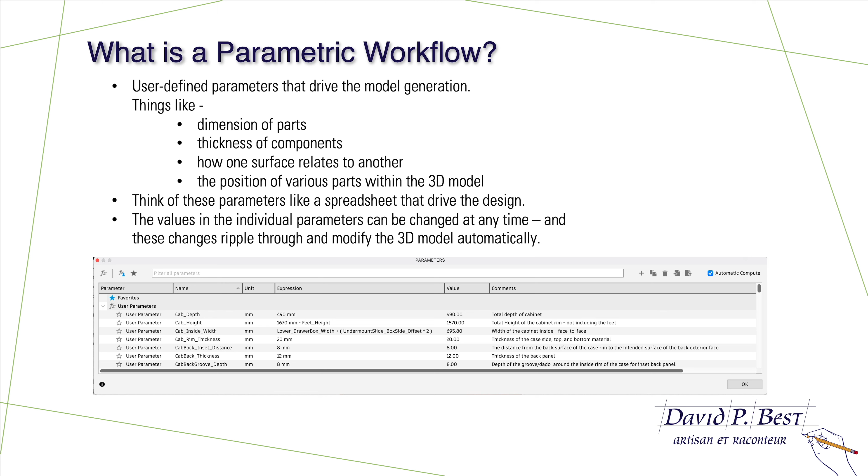So if you were to design a cabinet, for instance, that was 20 inches deep and you or your client decides, no, I'd really rather have it 18 inches, then you can change the parameter on the depth of the cabinet, and if you've done the design correctly, everything will update automatically, including the depth of the drawers, the sides of the cabinet, the size of the top, all of those attributes. So that's what we're after here.

I want to spend just a second here on some commentary about my desktop tools in the physical workspace that I work in. To use Fusion 360 effectively, you really need a 3-button mouse with a wheel. I happen to use one by 3Dconnexion, but pick your favorite brand. I do like a full-size keyboard because we're entering numbers quite frequently here in sketches and things of that nature.

The other aspect that I use is something called a space mouse. It's also made by the same company, 3Dconnexion in the UK. It's a puck that sits on the opposite side of the keyboard and is controlled with your other hand, and it allows you to manipulate the model as you're viewing it by zooming in, zooming out, rotating the model, turning it around, all kinds of things.

You can do those functions using a regular mouse and a bunch of option keys on your keyboard, but I much prefer this. I find it more intuitive. It's not cheap, it's over $100, but since I spend almost 40 hours a week doing this kind of work, I much prefer this to the traditional manual method of manipulating the view of the model within Fusion.

The other thing I'd like to point out is that throughout this whole series, you'll see a consistent use of toolbars that I have arranged the way I like to work. You can arrange the toolbar yourself however you want, but this is the toolbar I use for design, the toolbar I use for sketching. And you can add or remove tools or rearrange them however you want within Fusion.

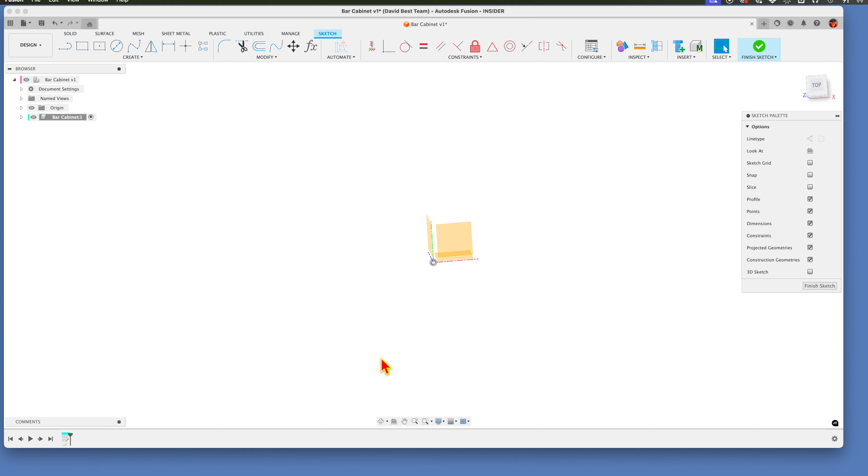So I'd like to first create a transparent model of the outside dimensions that the client gave as maximums. Let's create a sketch, and let's put it on the bottom plane here. Might as well talk about the origin here for a minute. Let me turn it on. I like to work in a coordinate system where the blue or z-axis is up, the red or x-axis is side to side in the design, and the green axis, also called the y-axis, is front to back. That's just my preference.

So we're going to create a sketch on the bottom plane there that represents the width and depth of the cabinet as specified as maximums by the client. So we're going to do a center point rectangle. If you don't have it on your toolbar, it's right here, and you can add it with those 3 buttons just like I talked about before. We're going to pick up that point in the middle, come out, and that's going to represent the maximum size of width and depth of the cabinet. We'll get to the height here in a minute.

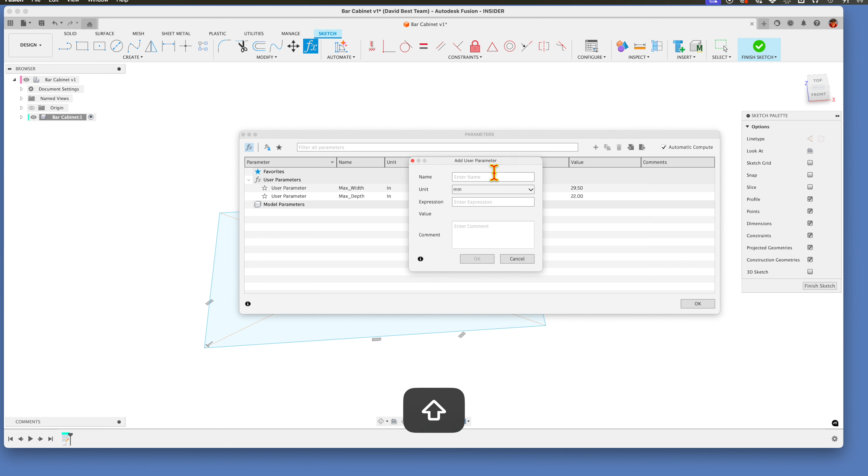I want to drive this with parameters rather than putting specific dimensions into this sketch. So let's create our first set of parameters here. This little plus sign here will allow us to create things, and we can specify units and all that. So max_width, that was given to me in inches, so we'll select that, and it was 29.5 inches. So we'll add that. There it is. Let's do another one. Max depth, and that was 22. And then max height, also given to me in inches, was 76. So there we are. Now we can use those parameters to drive this sketch.

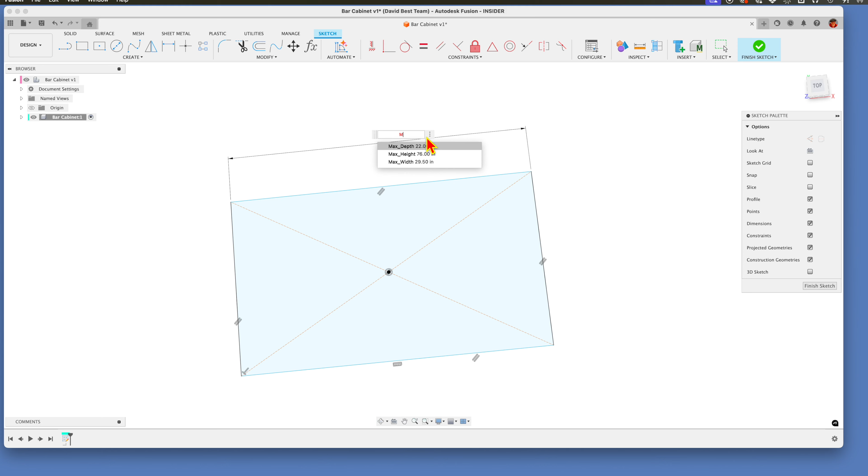So we'll say OK here, and it's time to put those dimensions on this. So D for dimension on the keyboard. Now we can just start keying in, and we get a drop-down list of things that have the letter M in it. So max width here of 29.5, and D again for this side, and this is M for max depth. So that's the profile of the bottom of the cabinet, maximum as defined by the client. We're going to use that now to create a component that represents those outside limits.

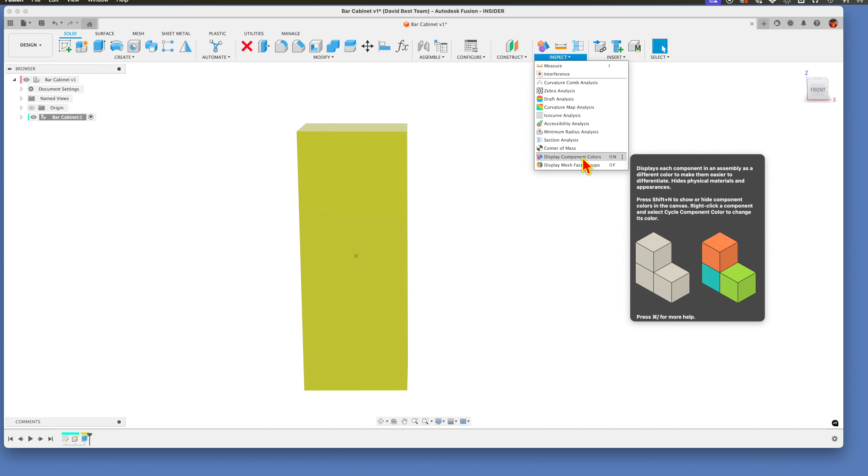So on the keyboard, E for extrude. We're going to extrude this up. How far are we going to extrude it? Well, we're going to extrude it max height, right there, 76 inches, and we're going to create a new component, not a body. So there it is. Now I've got it colored because I've got the inspect tool set to display component colors. If you don't have that turned on, you're going to get a series of gray boxes like this. So I prefer to have display component colors on, because then every component that's created in here will have a different color that's tagged by the lines on the top of the elements in the timeline, and also inside the browser.

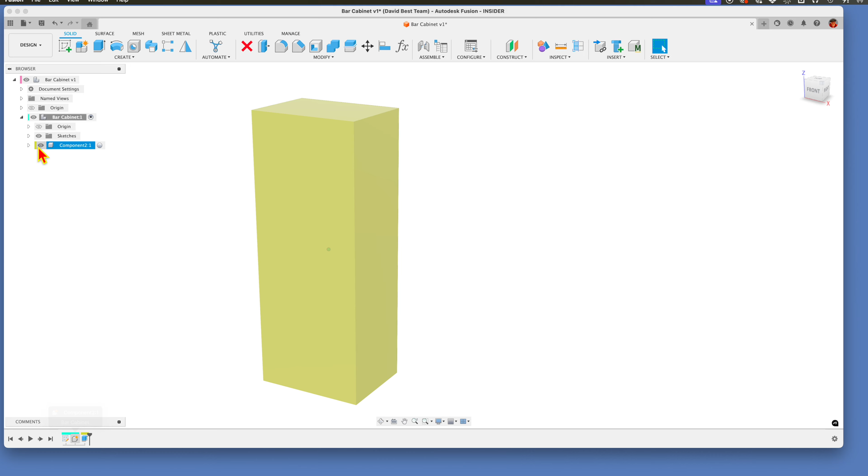So you see this green line there represents the green color of that component. Helps. It's not necessary, but I like to use it that way. So that's our maximum. Let's do a couple things here.

Let's first, I am a big believer in labeling your pieces in the browser here as you go along. And the reason is because you come back to this the next day and you wonder, where's the sketch for the bottom of the cabinet? And if you've got nomenclature that's sketch 1, 2, 3, 4, that's not going to be very helpful. So let's just change the name on that. 2 slow clicks on it and you can enter a new name. Max bottom profile.

And while we're at it, let's give this component that we just created a name as well. 2 slow clicks. Max outside dimensions. So there we are, and we can turn this on and off. We've got the 3 things that created it here in the timeline: the sketch, the create component, and then the body within it, created with an extrude. We could go back and edit those if we wanted to.

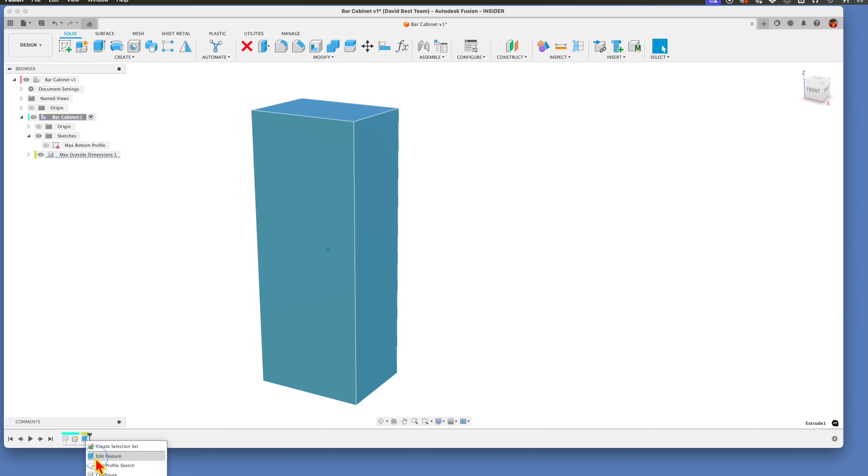For instance, let's edit that feature. Now we can go back and change these things again. That's the beauty here. All right, so that's our maximums. We'll use that in a different way here in a minute. Let's start working on the cabinet itself. And I like to start on something like this at the bottom and work up.

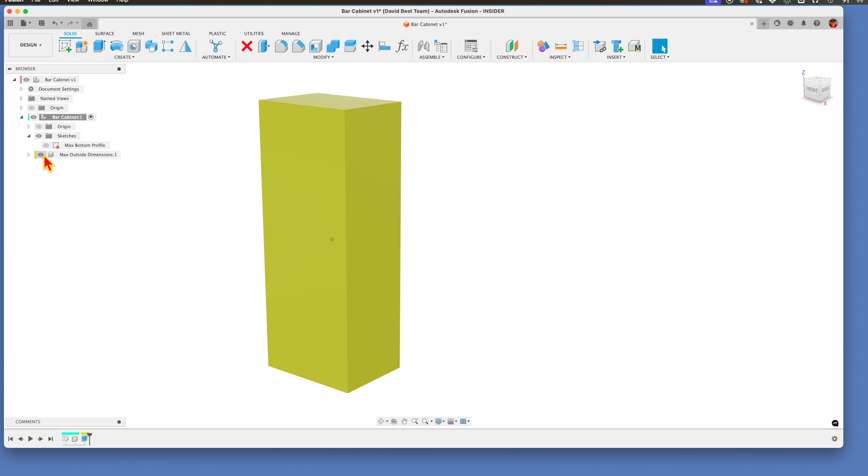So I'm going to turn that off, and I'm going to do a right click here, and I'm going to create a new component again. And this is going to be the cabinet case. And that will include the top, bottom, 2 sides, back, and legs. So let's just do that. So let's create a sketch of the cabinet profile starting at the bottom. We'll do a create sketch here, and we'll do this on the bottom plane, which is right there.

I'm going to use a center point rectangle again, and we'll pick up the center there, and we'll come out. I'm going to draw the bottom panel first. We'll come back in a minute and put in some dimensions. So if we pretend that's the bottom panel, we want 2 side panels. Whoops, I don't want to use a center point rectangle there. I want to use a regular rectangle.

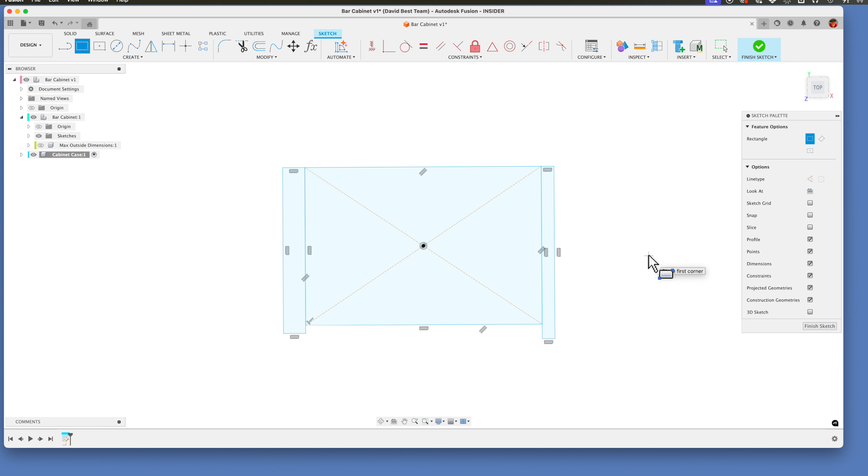I want to pick up that corner, come down here. We'll say that's the side. We'll put some constraints on that in a minute. This is the other side over here. Pick that up. There we are. Now, good rule of thumb here is to try and use constraints as much as possible rather than dimensions.

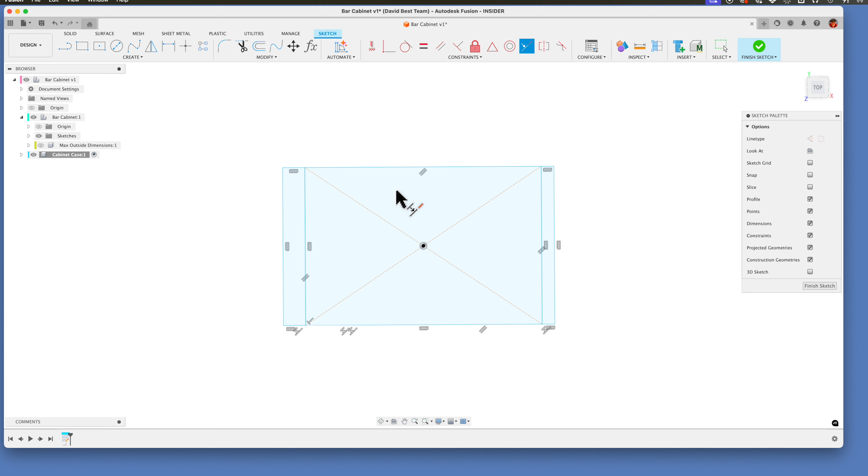So one of the things we can do is say, let's use the collinear tool and say the front of the side is collinear with the bottom. We can do the same thing on this side, front of the bottom. So we got 2 sides and a bottom panel. We need to put some dimensions on this. Let's talk about that for a second. A couple things come to mind.

I would like to keep these side panels, the overall depth of the cabinet, to under 510 millimeters, because that's the maximum capacity of my joiner planer. Remember, this is going to be done in hardwood, and I'd like to be able to glue up a bunch of hardwood panels and pass the whole thing through the joiner planer and then trim it to size.

So let's create a couple of parameters here. Let's say that the cabinet inside depth is 490 millimeters. You can see I've already done that. And I've temporarily created another one here called cabinet inside width of 27 inches. We'll get back to that here in a second.

So the thing that's going to drive the width of this more than anything is the bottom drawer. I outsource all my drawer boxes from a third party. They build it to any specification I give them, but they like to talk to me in imperial rather than metric. So to keep things simple with them, I try and, where possible, make my drawer widths and depths whole

inches. So let's just say, for example, that the drawer width here would be 27 inches. That'll certainly fit inside the maximum limits given by the client. So I've defined that here with a cab inside width of 27 inches.

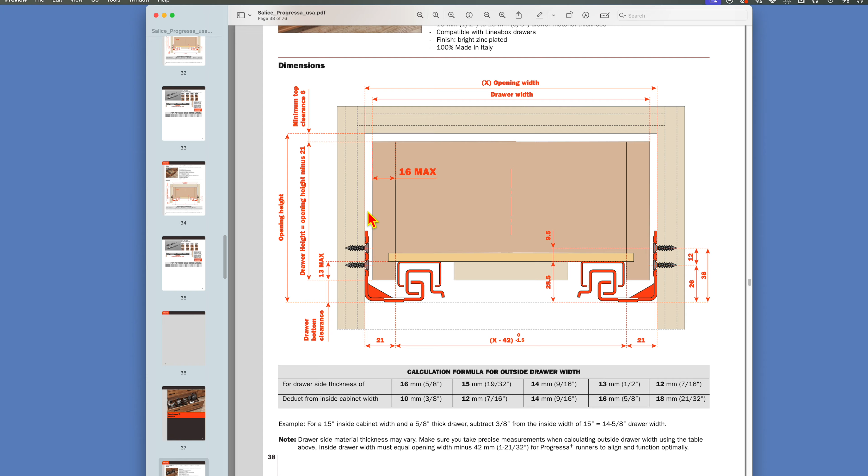Okay, we're back in Fusion. Let's put in some parameters here. I'm going to give them some names. We've got drawer box side thickness. We'll use 16 millimeter material here. My cabinet box supplier is fine with that.

Let's do that offset. Drawer box side runner offset, and that was 21 millimeters. So we've got those two.

I think we're going to do a drawer box that's 15 inches deep - I'm sorry, depth of the cabinet. So let's put that in. We can come back and change that later. Drawer box depth, and we'll put that in millimeters. So we'll say it's 15 inches times 25.4. That doesn't look right, does it? Let's do this differently. 15 inches - how about that? There we go.

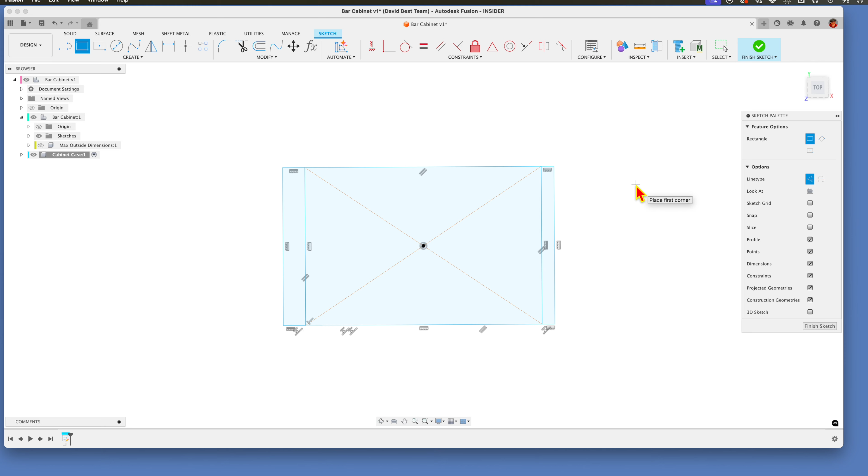So we got those, and now let's go back to our sketch and start putting in some things here. Let's do another rectangle. This time I'm not going to use center point, you'll see why here in a minute. But I do want this to come in as construction geometry rather than hard geometry lines. We can do that a couple ways - you can click on it over here, that'll give us a construction line, or X on the keyboard will toggle that on and off. So let's just draw something here that will be our sort of pretend - whoops, try that again - that'll be the pretend outside of the drawer box, and it's a construction line.

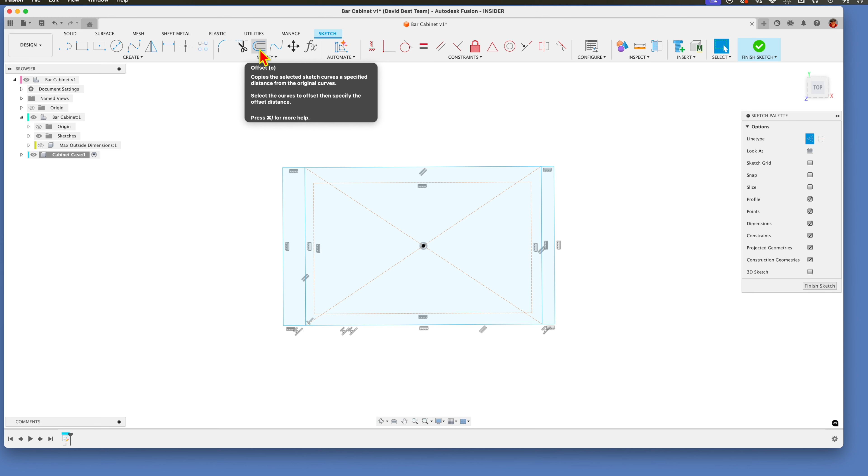So that helps. Now we have an offset tool here in our sketch tools, and we can say let's take that and let's offset it, and the distance here we're going to go to drawer side thickness. There we go, so that's 16 millimeters. You can see we've got an FX on there, which means it's derived from a parameter.

Now what else do we need? Well, we know that this distance from the inside of the drawer face to the side of the cabinet, that's that drawer box offset, 21 millimeters. And we know that's also true on this side, so let's put that in. We don't have to select, we can just click over here and duplicate that dimension on this side. So there we are, and we know the outside of the drawer box is 27 inches.

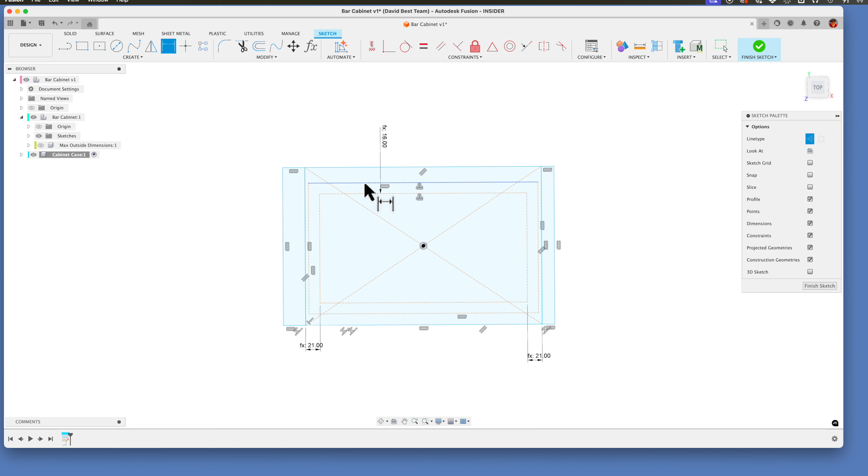So that's this line right here. So we'll dimension that - probably going to get something pretty weird here. Did we have a parameter for that? No, let's do that, let's create a parameter right now. We'll just let that be whatever it is - width.

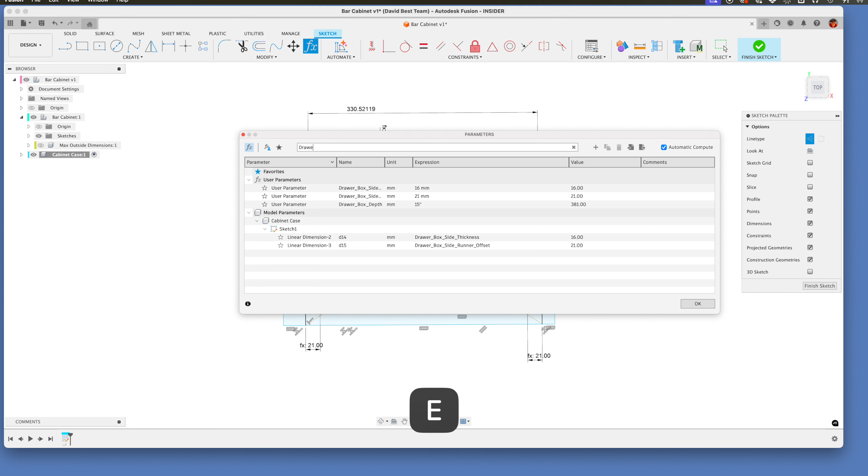Sorry, I didn't create a new one, I do that a lot. So we're going to do this - we're going to create drawer box width, and it's going to be in inches, and it's going to be, we're going to try 27 here. How's that? Okay.

Might be good to, at this point, define the thickness, at least initially, of these side pieces that we're going to mill up from solid cherry. Let's add that as a dimension here, so we'll call that cab side thickness, and let's make that 20 millimeters. How about that? There we go.

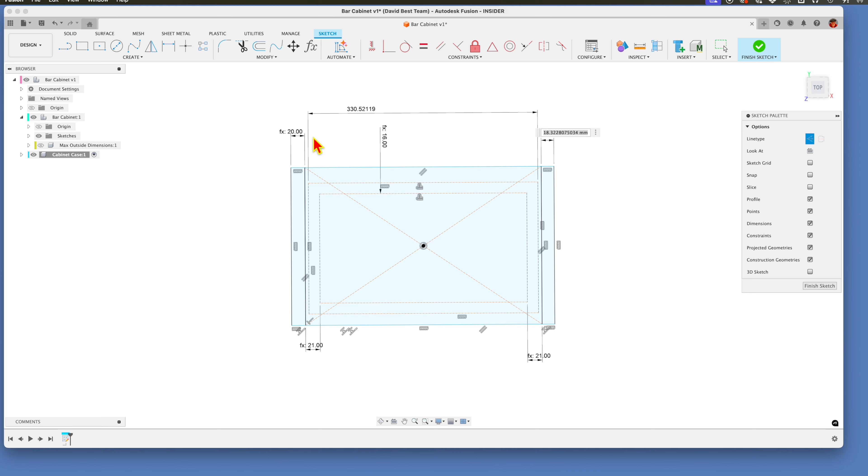So let's put those in here - D for dimension, let's make this the cab side thickness. We'll do the same thing over here, we can copy that one again. And then this one is not 330, it's the new parameter that we put in, which was drawer box width of 27 inches. There we go, the whole thing is going to scale up. And I talked about wanting this side piece to be about 490 millimeters deep. Did we make a parameter for that? Yeah, there we go, cab depth.

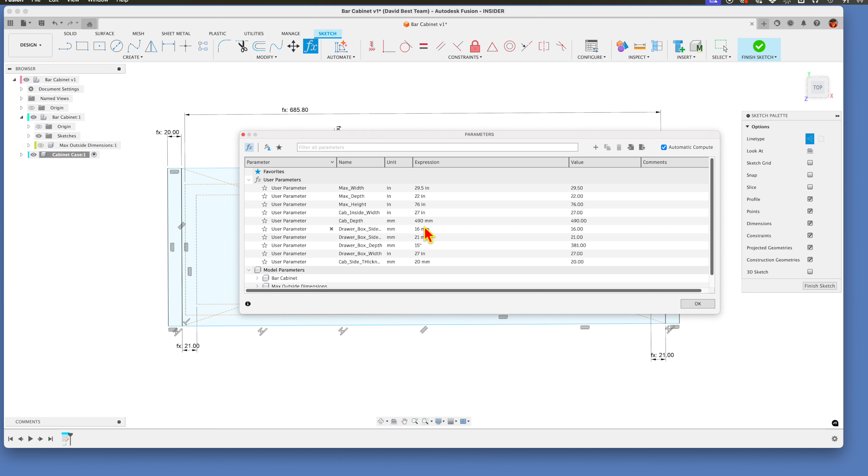So cab depth is 490, that's our overall thing. Two sides, a bottom. This represents the drawer box on the lower part, at least side to side. We could dimension that drawer box depth here. Drawer box depth, there we go. Now it's actually going to sit inside this cabinet somewhere, so we can drag that up just for a visual standpoint.

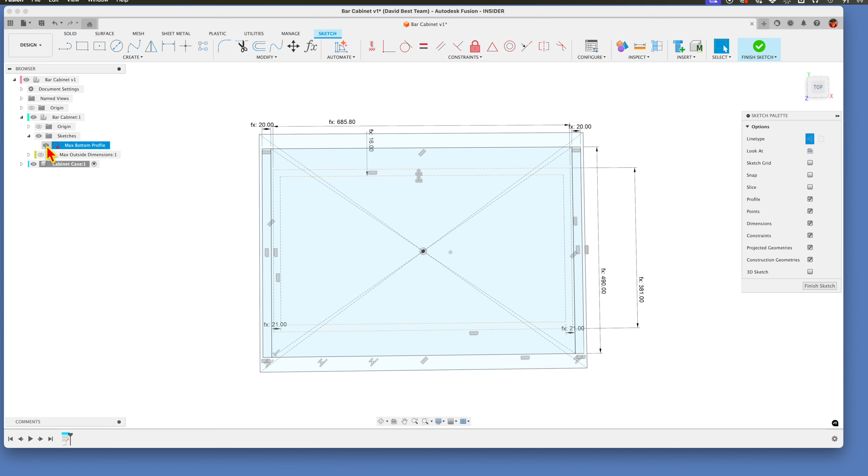So there's our overall dimensions for the cabinet, at least to start out with. We could turn on the sketch for the maximum dimensions, which is right here. And we can see that we're definitely inside those parameters, even with 20 millimeter thick sides and a 27 inch wide drawer box. It's not as deep, but the client says that's fine. So there we are. Let's finish the sketch.

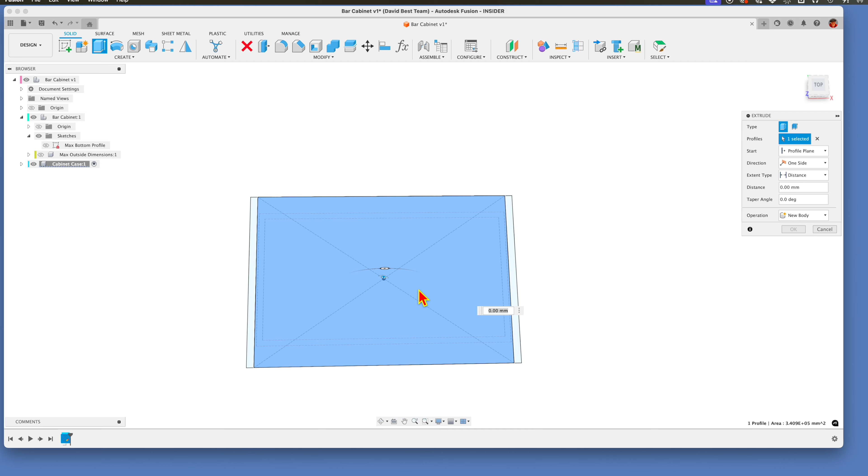At this point, we're going to create the components that represent the bottom and the sides. We do that with an extrusion command, E for extrude. We'll pick this profile, and notice that it picked the whole outside of that rectangle rather than the drawer box inside. That's because the drawer box lines are construction lines, so it doesn't recognize those as valid for something like an extrude command. So anyway, we're going to extrude that at a distance, and let's assume that the top, bottom, and sides are all the same thickness. So we had a parameter for that, cab side thickness.

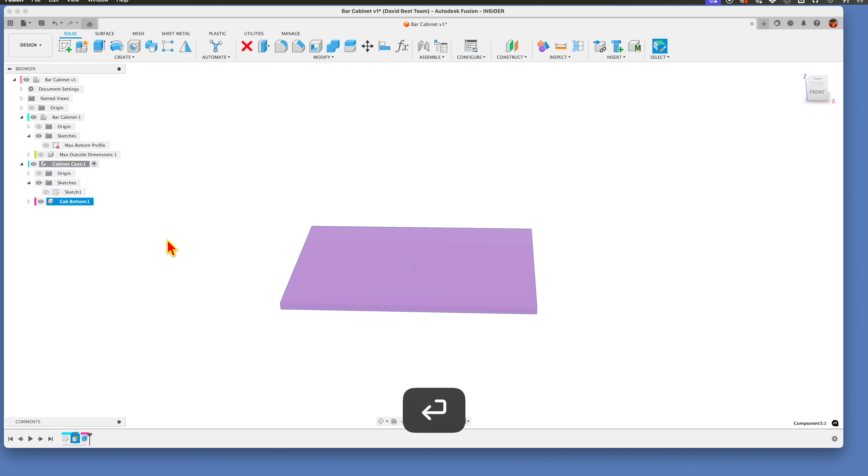There we go, and we want to create a new component. So if we look inside our cabinet case component, we have a new component here. We've got that sketch that we just created, and inside that component is one body right there. So let's name this cab bottom. Let's name our sketch cab bottom profiles.

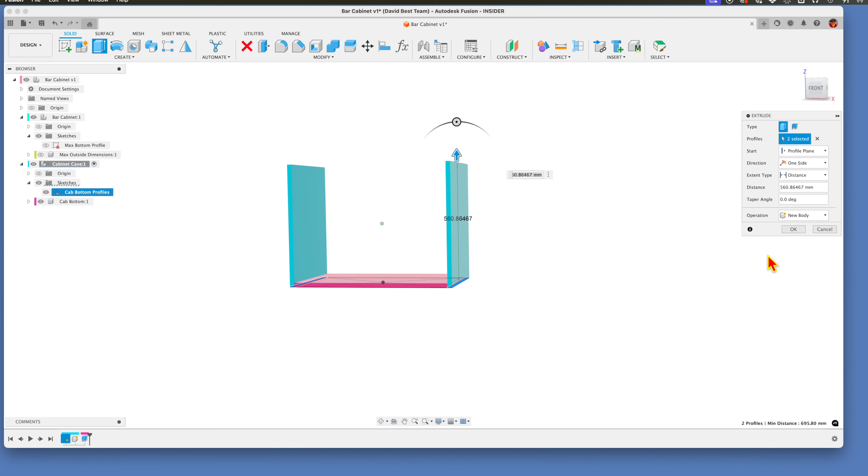So let's create the sides now. We can turn that sketch back on, and E for extrude. We'll pick these two profiles, we're going to go up, and we're also going to create a new component. And the distance here is our... we didn't define a new cab height.

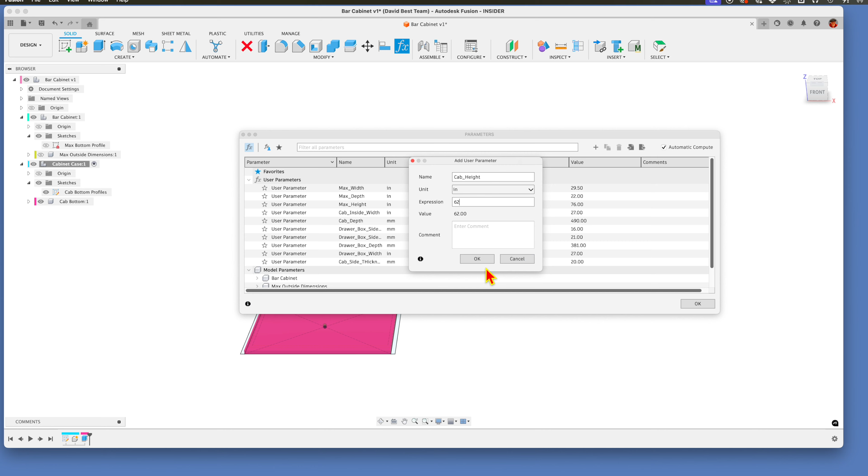Okay, we can do that now. Let's cancel out of this. So let's go back into our parameters, and we don't have one here, so let's make a new cab height. This is going to be without the legs. The legs I see on this will be about 4 inches. So I want this to be in inches, something like 62 inches. Let's try that. We can always come back and change this later and have that update the design. So let's put that in.

Now we can come back and create the sides. E for extrude. Side 1, side 2. We're going to create a new component. The distance is going to be cab height. There we go, and we've got it over here in our browser now, and we can name that cab sides.

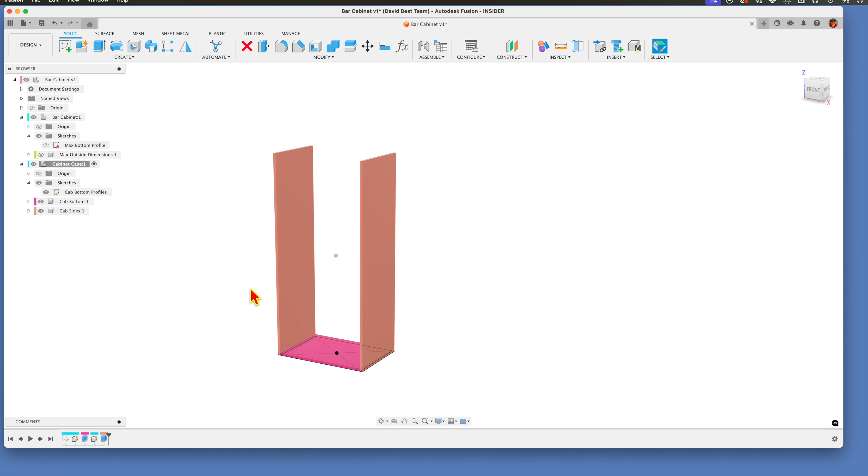And now we want to do a top. So the easiest way to do the top would be to mirror the bottom component. Think of the mirror command in Fusion kind of like it sounds. We'll put a mirror up here, a reflection surface, and just reflect the cab bottom component to the top of the cabinet. So to do that, we're going to need a reference plane that is essentially the reflection surface. Let's turn off this sketch. So we can create a center plane between the top surface of the cabinet and the bottom surface of the cabinet now, to do that mirror command.

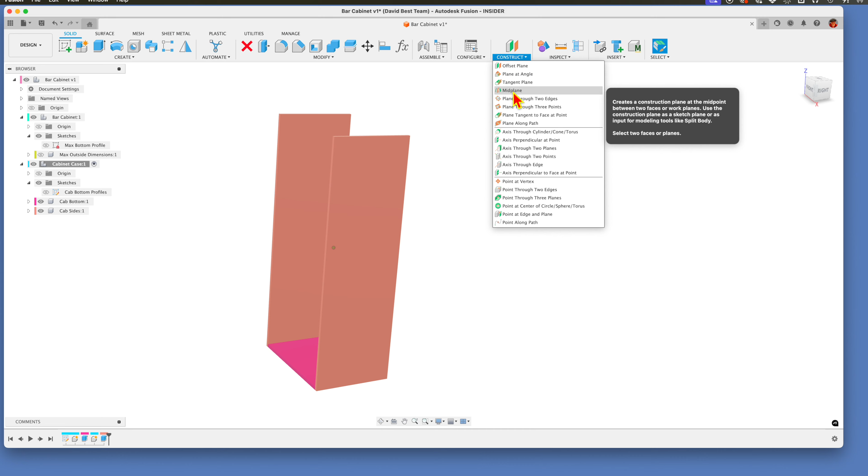So construct, we can do a mid plane, and I want to go halfway between there and there. And there it is. So we can use that as our reflection surface. Now look over here, we have a new item that showed up in our browser called a construction plane, and right there it is. And we can turn it on and off.

We can come in here and do an edit feature, and come back and redefine the two selected sides, and all the standard operations apply. Let's give it a name because we might use it in the future and want to know what this is. So this is mid bottom to top.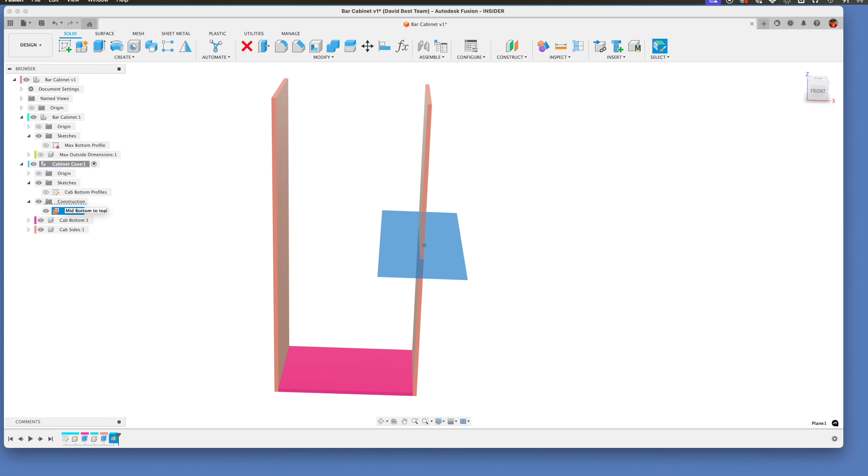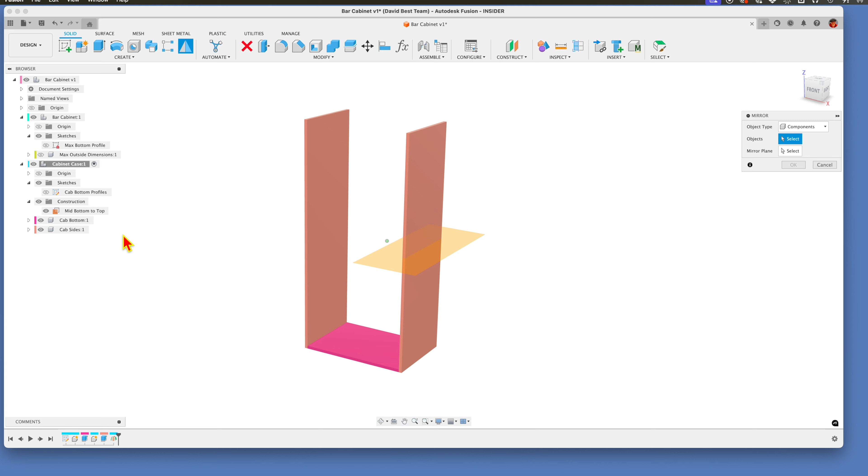There we are. Now we can mirror that bottom component using that as our reference point. I have it in the toolbar up here, right there. I'm sorry, do I have it here? Ah, there it is. So it's under Create, and it's down here if you don't have it in your toolbar. So we're going to mirror, and we're going to mirror a component, and the object it wants us to select is the bottom in this case, and then the mirror plane is that construction plane that we just made. So there's our top component.

If we say OK, we got a new component over here in the browser. It's been labeled cab bottom mirror. Let's relabel it to cab top. How about that?

I'm going to turn off this construction plane here. We're going to add another one here in a minute. So that's our basic box. Let's put a back on this thing.

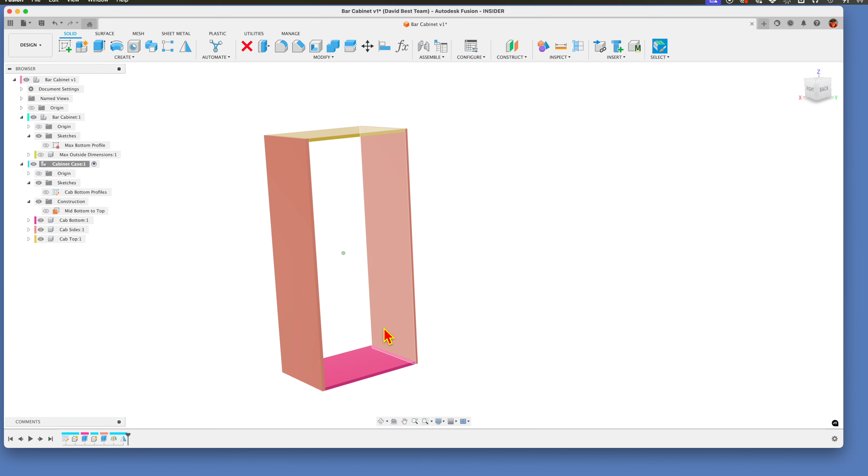I see this back being a 12 millimeter thick cherry veneer faced plywood, and it's going to be let in on all 4 sides with a groove or a dado, and it's going to be slightly inset from the back face of the cabinet rim. So let's create some parameters to drive this.

Let's do this. Cab back thickness, and we'll make that 12 millimeters.

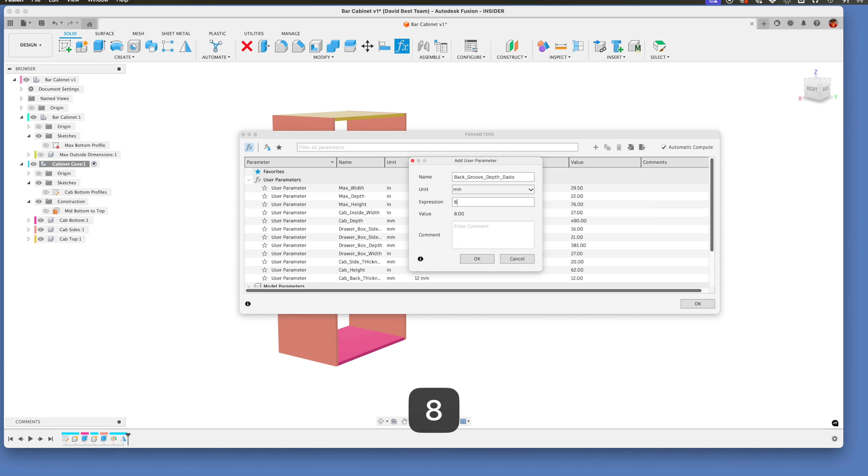Let's do another one that defines the back groove depth. I'll put dado in there just so I know exactly what that is. How about 8 millimeters? That's... let's do 9. That's... no, let's do 8. I like 8 better. That's a little less than 3/8 of an inch.

And then we're going to do a back face offset of, let's do 8 again. So now we've got those parameters in here. By the way, you can sort these by clicking on the heading there, in case I didn't say that before.

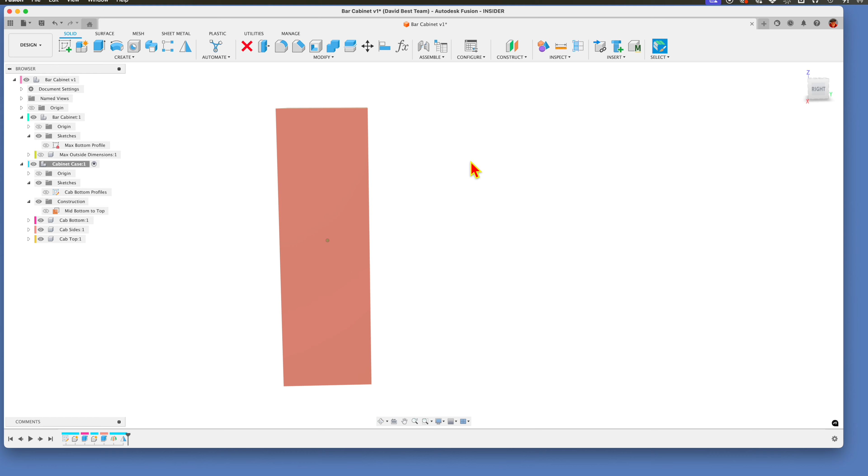All right, now I like to put sketches on construction planes rather than on actual geometry that's created in the model. So let's create a construction plane to do our sketch for the back panel.

So we're going to do an offset plane, and we're going to offset from the back surface of the cabinet. We're going to go this direction, so it needs to be negative, as you can see over here. And that's our back face offset of 8 millimeters. So now we have that plane there.

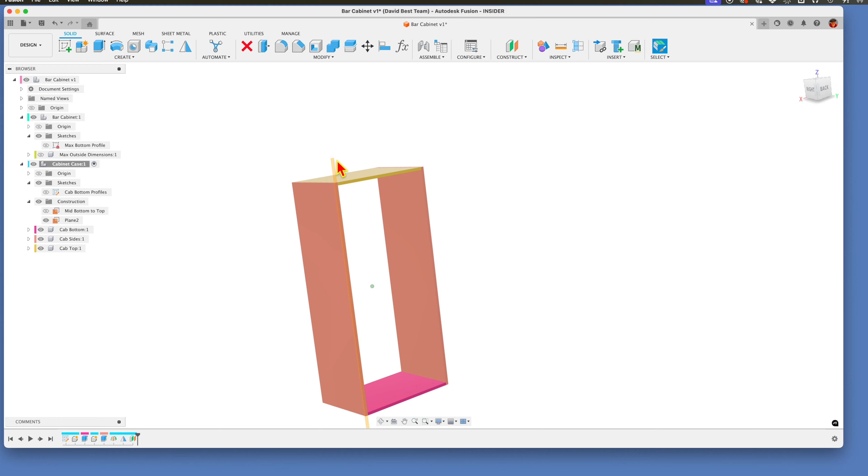We can drag this out so we see its visibility, and if you look closely, can you tell? Yeah, you can tell it's inset. So we can use that to sketch on. Let's do that now. Sketch on that surface.

Now we need... we want that back panel to be in reference to the inside surfaces of the cabinet rim. So there's a command in Fusion that can pick up those geometries. It's called project, P on the keyboard for project. We're going to project that surface, that surface, that surface, and that surface onto our sketch plane.

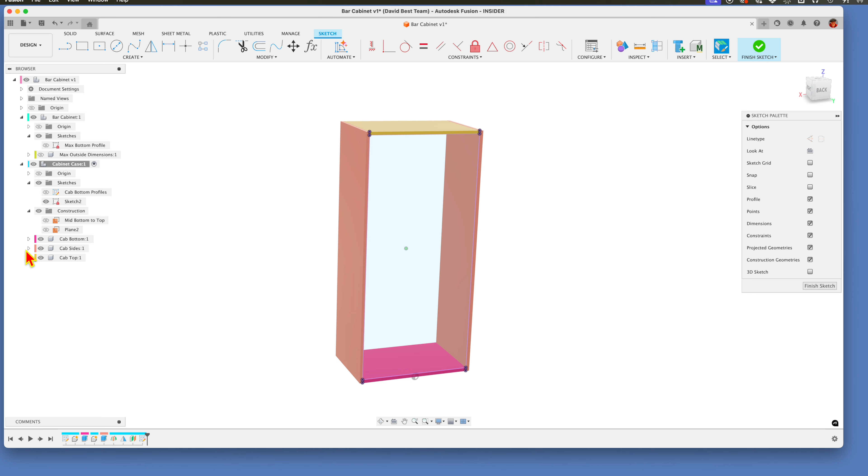Now, you probably can't see it yet, so let's turn off the actual components, and there is what's been projected. And we're going to use those to size the back panel.

But before we do that, I want to convert these projected sketch lines into construction geometry. You can see they're solid now, they're purple, which means they're projected, but I want this construction geometry rather than hard lines. And you'll see why here in a minute.

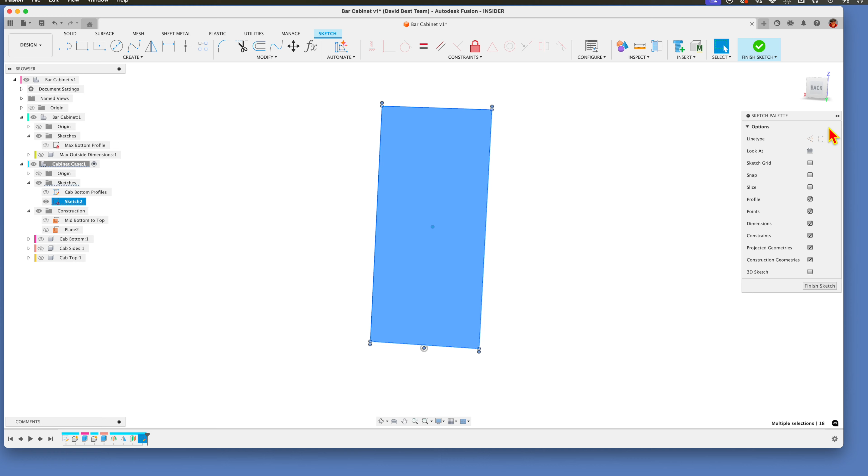So I'm going to use a mouse over, so if I just click and drag, I can pick that whole thing. Let's show you here, if you want to do a window selection, you can select that here, and I can swipe over the whole thing. Now it's selected all those elements, and I can click here, and those are now turned into construction geometry. You'll see why that's important here in a minute.

Now the next thing is the back panel itself. Let's re-edit that sketch, and let's put a rectangle over it. That's going to be our back panel.

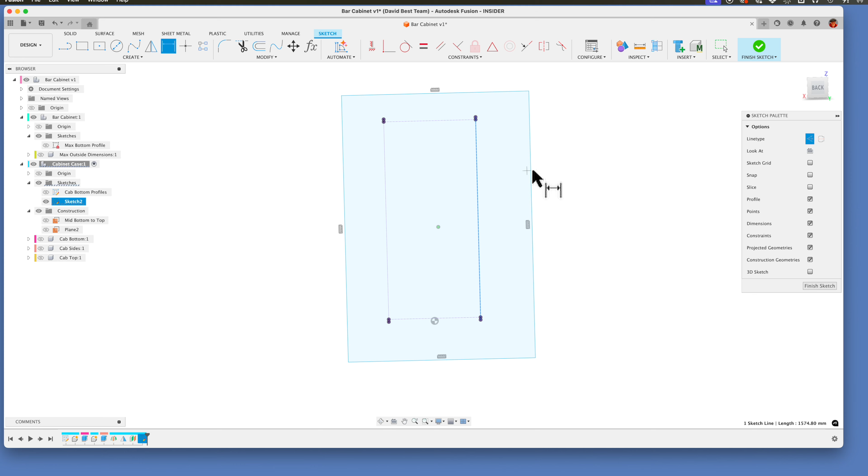Now we know that the back panel is offset into the sides, tops, and bottom of the case by that groove depth. So let's add that. So D for dimension, relative to the side, this is the back groove depth. The same relationship is true here, and we can just click that. And another one here. And the last one.

So now we can use that profile to create the back panel. We'll finish the sketch. But before we do, if you notice when I click on that, it picks up the whole back panel. If those projected lines were not converted to construction lines, it would pick up the inside rectangle rather than the outside. That's why I converted it to construction lines.

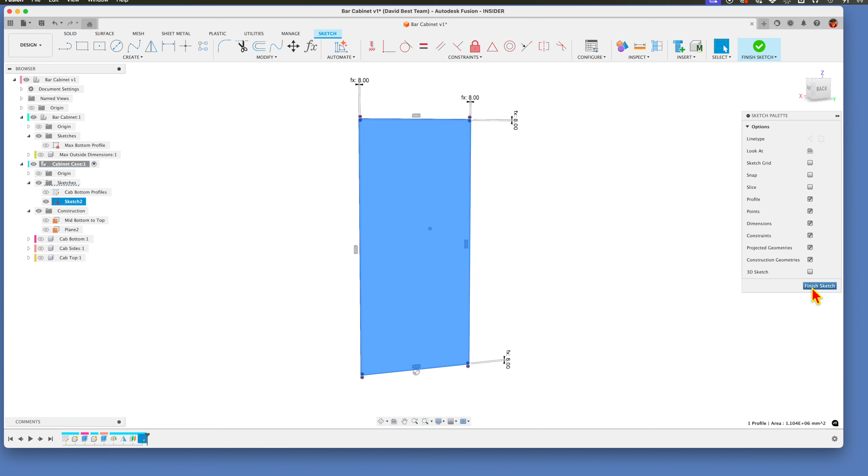So let's... we're going to E for extrude, and we're going to go inside the cabinet, and we're going to go to a distance of minus the back thickness. There we go. So there's our back panel.

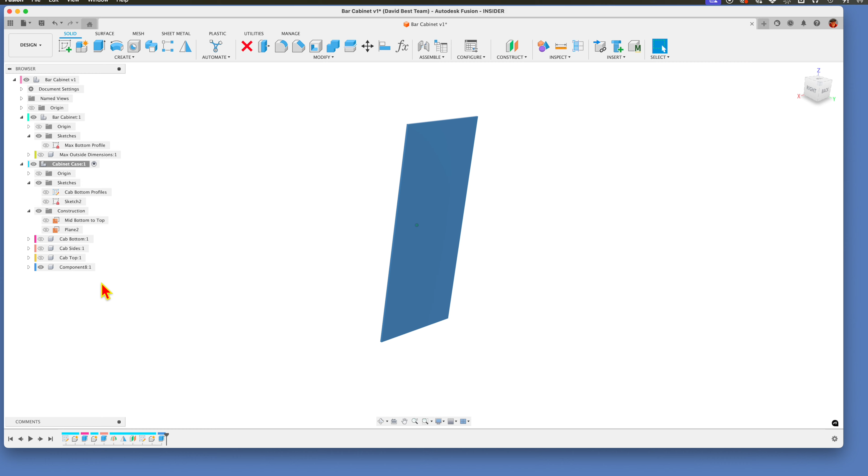We want that to be a component. And let's label that now. Might as well name this as well, back panel profile.

Let's bring back our other cabinet components. So there's our cabinet box, and you can see, if you look closely here, it's inset. Now what's wrong with this?

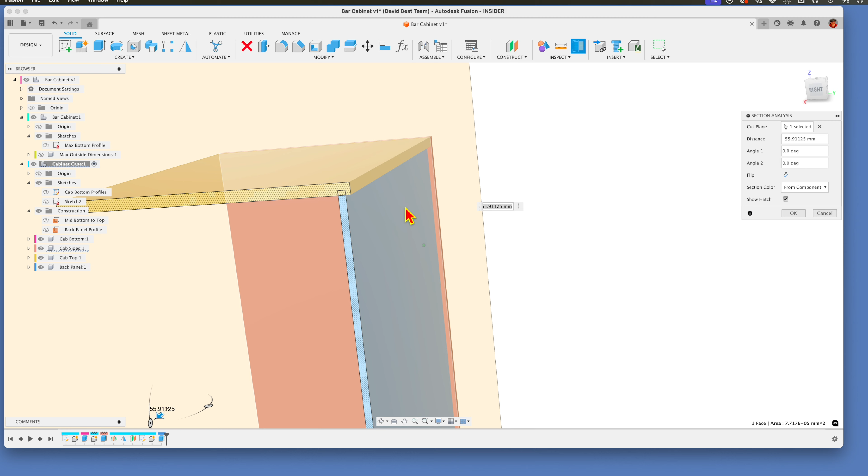Well, it's a good time to use the section analysis tool here. So let's do a section analysis based on the edge of this, and we can drag in. And if you look closely, the back panel is in fact bigger than the inside of the cabinet case, but it overlaps it. So we need to actually put the groove in the top, bottom, and sides.

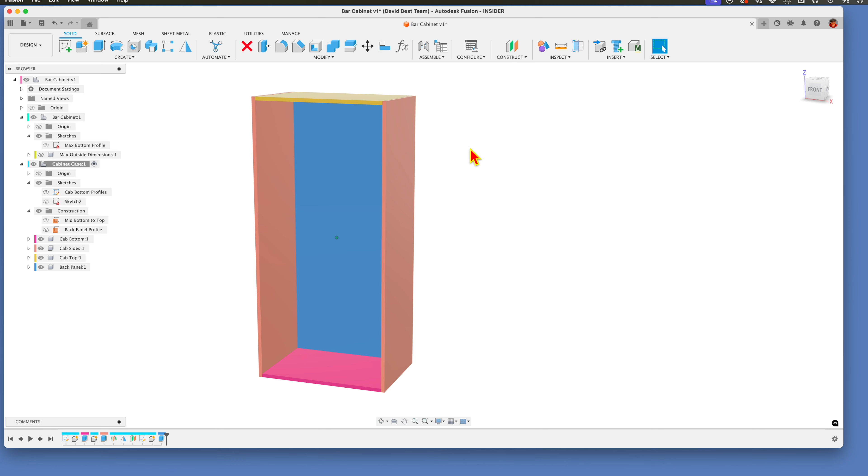And there's a handy tool in Fusion to be able to do that if you've already got something created as a component that can be the tool to cut the groove. So that is unfortunately named combine. It will combine things, but it will also do Boolean operations like find the intersection and delete surfaces and that sort of thing. So it's right here on my toolbar.

It's under Modify, Combine, right there. So let's just do that. So it works in terms of a target body and a tool. So the target bodies here are the two sides, top and bottom. And it'll only do one at a time, and it'll do Boolean operations. It'll join, it'll cut, and you can keep the tools after the operation if you want as well.

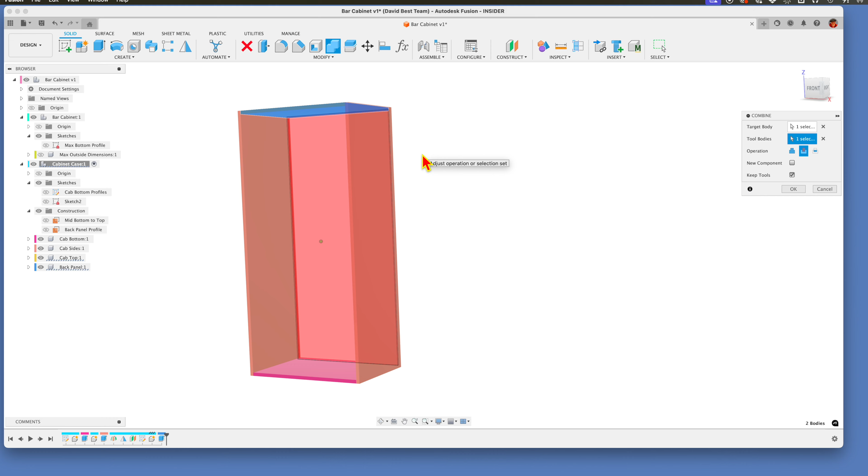So let's do that with the top first. So the target body is the top panel. Let's just click on that, and the tool body is the back itself. And that's turned into this red translucent thing. That's a cue to you that this is a cutting operation that's going on. If we did a join operation, it would look differently. So we want to cut that, and we want to keep the tool, so the back panel doesn't go away on us. So we'll do that one.

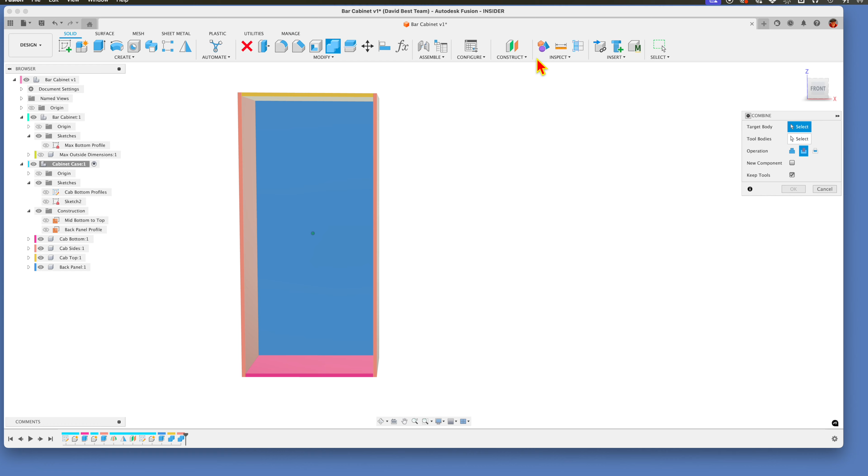We'll do another one here. Combine. This is the target body. This is the tool. It remembers all the settings from the first use. Okay, now a little pro tip here. If you do a series of repeated operations, if you do a right click on your mouse and drag up like that, you get the last tool that you used from the toolbox. So bottom panel, and there's our cutting tool again. We're going to keep the tool, do a cut operation once more, side and the back.

So now let's go back and do our section analysis again, and you'll see that it actually put the groove in the top and bottom. We can X out of that and look at it from this plane and come down, and it's done it to both sides as well. I hope that's obvious. So I think we have our box for our cabinet. We need to put some feet on it. We'll do that here in the next operation.

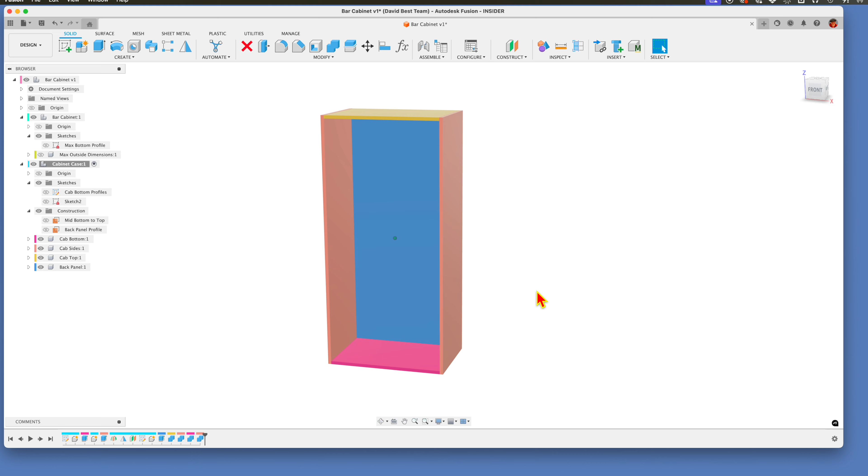I'm not exactly sure what kind of feet we're going to do here. The client said, gee, I like things that look solid and beefy. This is a big, tall cabinet. I don't want it looking like it's on wimpy legs. So let's create some legs here. Since we don't know what the client's going to really end up liking, let's create some parameters around it. To do that, let's do some sketching.

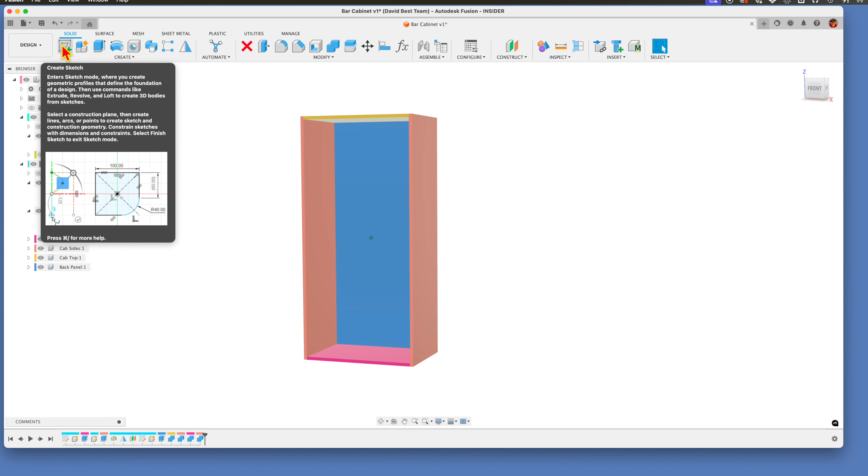So I want to create a sketch, and this time I'm going to use the bottom panel. So let's create another construction plane. Here we don't really have to do this, but I prefer it. And let's label it over here. Bottom face of cabinet. Oh boy, sorry. Bottom face of cabinet. Now we can use that as our construction plane for creating another sketch.

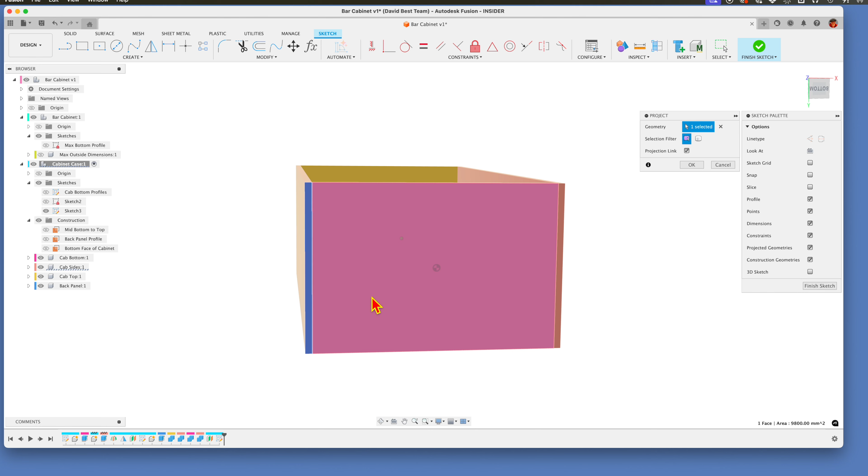So there's our sketch. Let's get some of the geometry of the cabinet projected here for us. P for project. Let's project the two sides and the bottom. And just so you can tell, there's our projected stuff, and like I did before, I'm going to swipe over it and convert it to construction geometry. So now I'm just going to put in two kind of squarish legs here with a rectangle tool. There we go. Let's create some parameters that drive that, because we know they're going to change probably.

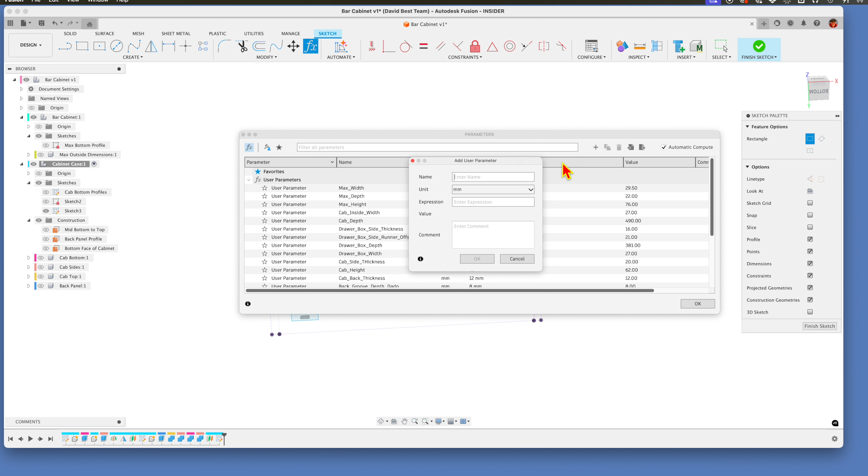So plus for parameter here, leg width is, I don't know, let's make it maybe 100 millimeters, about 4 inches. And then let's define how the leg relates to the cabinet sides, front and back. So we'll just call that leg offset. And how about if we make those 40 millimeters? See what this looks like when we get going. Let's try that.

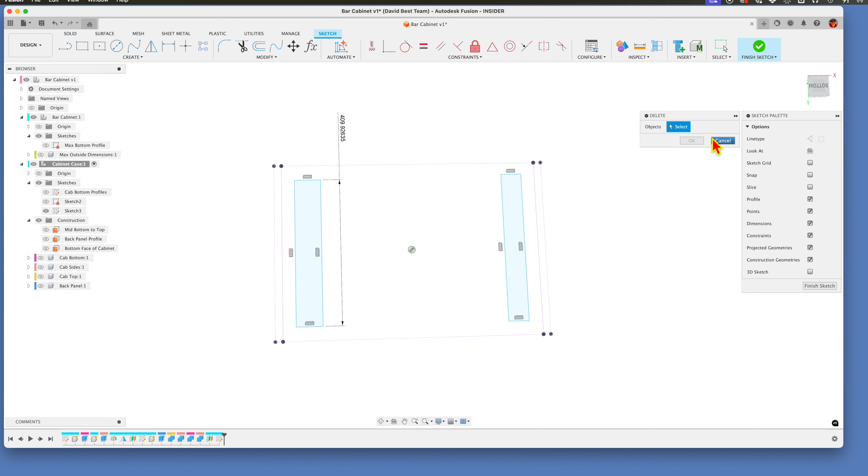So let's put those dimensions in now. D for dimension. This one was the... we didn't define that, did we? Let's take that out. That's not what we did. Let's remove that dimension. We wanted it related to the cabinet itself. So D for dimension from here to the side of the cabinet. We said that was the leg offset. We could do the same thing here. And relative to the back. There we go.

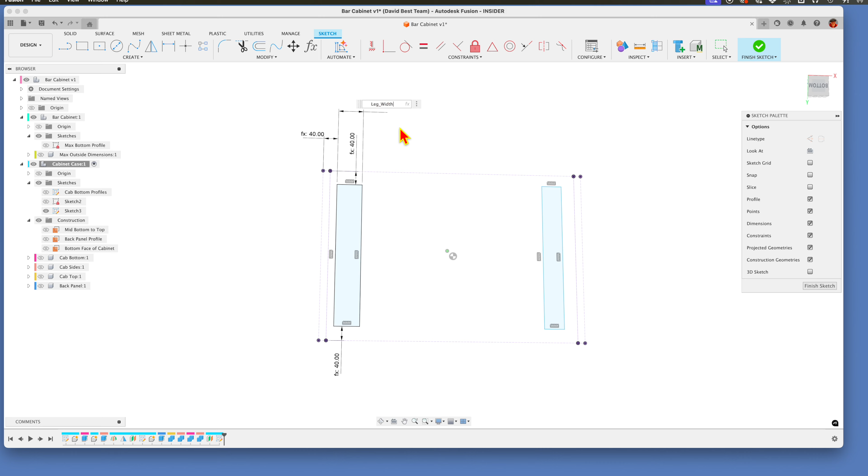And then we did do a width, right? D again for this. And that was leg width. There we go. Now we could have done this and mirrored it across. Actually, why don't we do that just for illustrative purposes here? Let's take this sketch out. So we deleted that. Now let's create a mirror line.

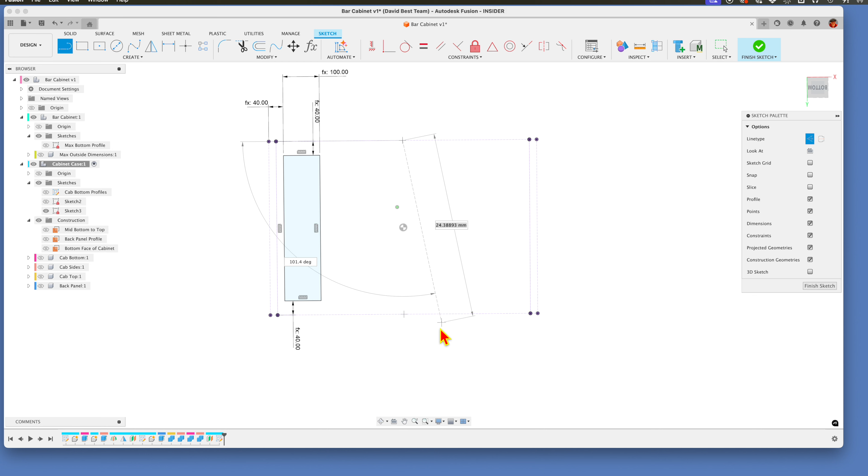L for line, and I want it construction again, so we'll do that. I want to pick up the center point of that to the center point of that. So that's kind of the midline between the two outside faces of the cabinet. And we can say now, let's escape out of that. Let's do a create mirror, and let's swipe over this. So we're going to take that.

We've selected 8 objects. So we've got 4 lines and then 4 constraints. So those are horizontal, vertical constraints. And the mirror line we're going to use, we'll select that right there. Bingo. So we got our second leg. All right.

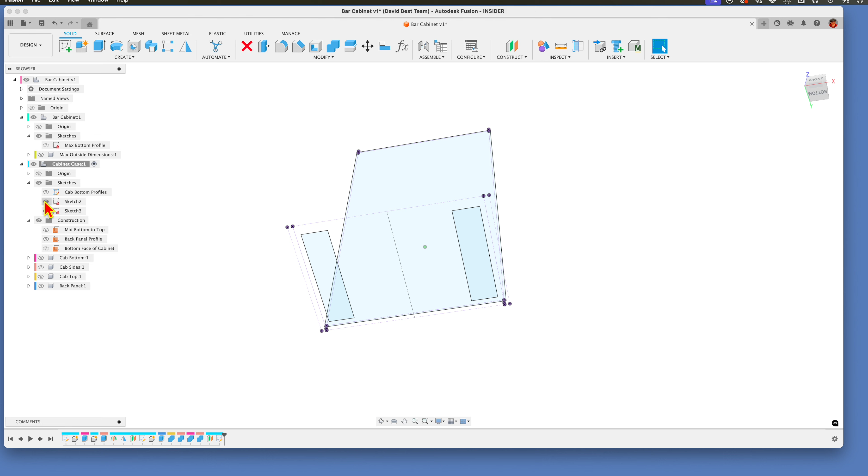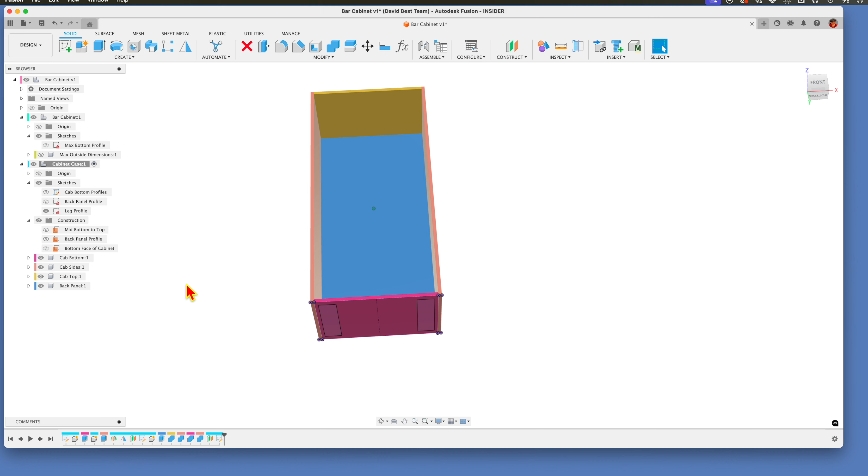We need to do some housekeeping over here, don't we? Let's finish that sketch. What was this sketch? Let's label that so we know what it is in the future. That's the back panel profile. And this is the leg profile. All right, we can get the rest of our cabinet turned back on. And I think I talked about making the legs 4 inches tall, so let's try that.

E for extrude. We're going to pick these 2 profiles. We're going to create new components. And the distance, 4 inches. We could also drive that with a parameter. Let's put that in here. Plus leg height. And we'll put that in inches and call it 4.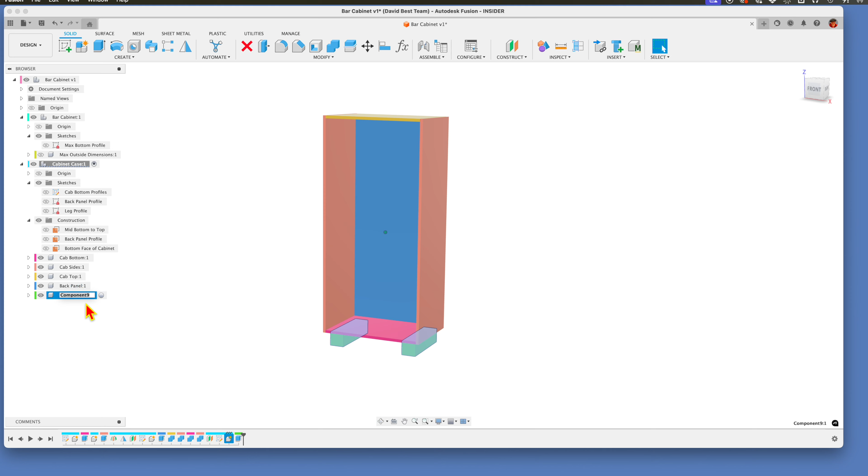There we go. Now we can come back and right click on that and edit feature. Now instead of 4 inches, we can change this to leg height. So that'll change if we go back and edit those parameters, which we're going to do here in just a minute. So let's label this. This is our leg components.

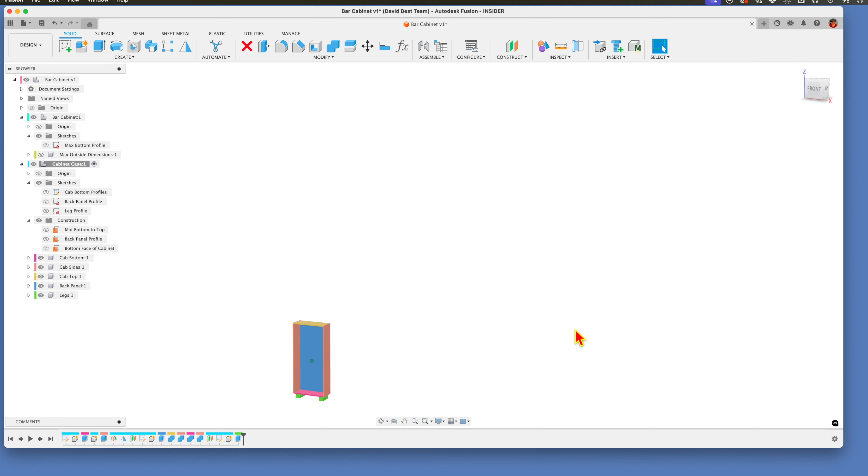Now let me just illustrate why we did all these parameters. Let's say the client said, you know, I made a mistake. The cabinet really can't be more than 300 millimeters deep. So let's change that and watch what goes on here. So our whole cabinet got slimmer. And notice that the legs, because we defined them as an offset to the sides, front and back surfaces, those change dimensions too.

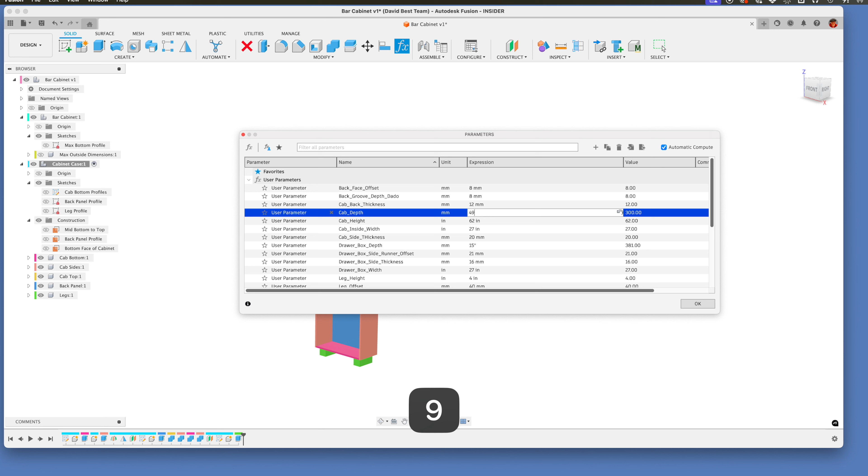If we decided we're going to make the cab height not 62 inches, but let's call it 75 and see what happens. So zoom, there it goes. And notice, again, the size of the back panel tracked with that. The grooves got recut in different positions. So that's really the beauty here of this parametric design. I'm going to go back now. This was 62, and the cab depth was 490. There we go. So we're back to the original.

Those legs look kind of clunky. I kind of like elephant feet. Let's try that. Let's modify this, edit this leg creation feature here. We've got a taper angle here, so we can cause that to splay out on all sides as it goes. How about trying 10 degrees? That may be a bit much. How about 8? There we go. And they still look pretty clunky.

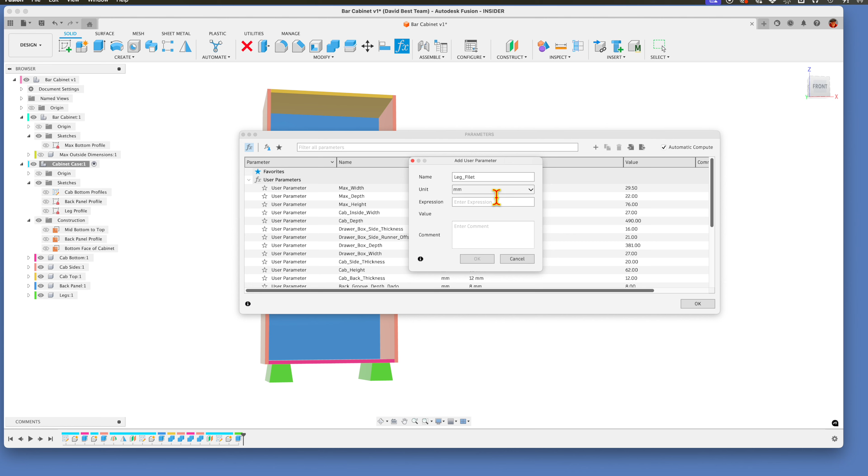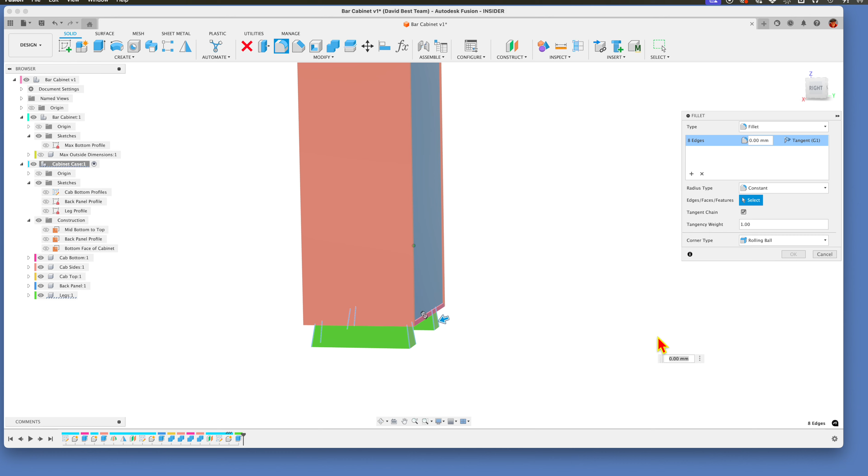How about if we put some chamfers or fillets? Let's do that. Let's create a fillet parameter here. Leg fillet. Sorry. Plus. And let's make those, I don't know, 20. Let's see what it looks like. We can come back and change it. So here's our fillet. So let's put fillets on these corners. Might as well do them all. There we are. 8 edges, and this was leg fillet.

That looks a little better. Let's make it a little bigger. Leg fillet, let's make it 40. How about that? Okay, well, we're kind of getting there. That angle still looks a little steep to me. Let's re-edit that. Edit feature. Let's make this 5 degrees instead. Okay, that's probably a good placeholder for now. So there's our basic cabinet box.

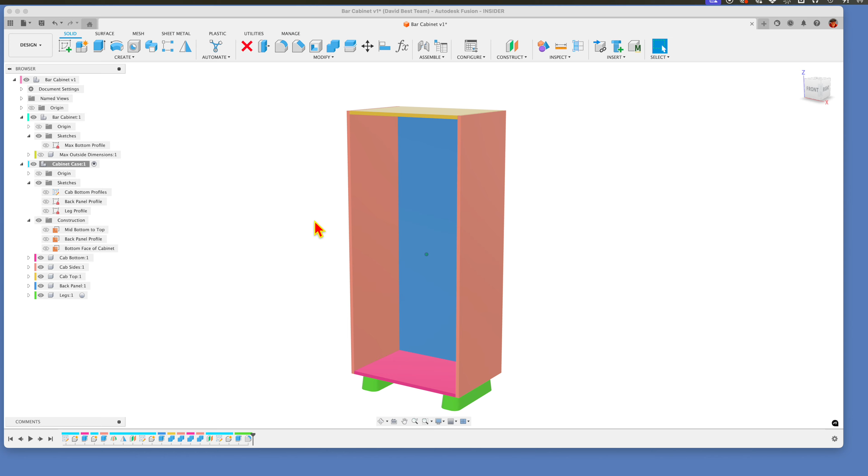So I've got a couple more housekeeping things I'd like to do here. The first thing I want to do, I should have done this earlier, but let's save this. So Control or Command S on the keyboard, and that will have saved it. Let's open the data panel again, and user saved. You can put a milestone marker in here if you want. And if you notice, the version number over here, once it gets done uploading into the cloud, has now changed to version 2. You can actually go back and open prior versions if you want. Sometimes that becomes very helpful if you get too far ahead of yourself and need to backtrack.

Fusion will also automatically capture essentially a backup. You can specify that in the preferences for your settings, so that if it crashes, which it does not often, but enough to really irritate you when it happens, you've got something that's at least recoverable from the last 5 minutes or so.

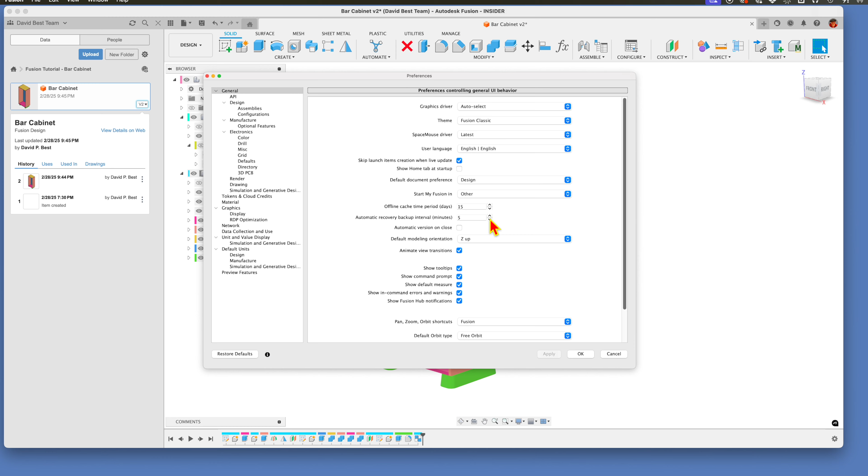So housekeeping wise, we're going to get a little bit ahead of ourselves here, but one of the things I want to do now is join all these components together into a rigid structure as though they've been glued up together. I can grab these things with my mouse and move them around. I'll show you here. So the sides, because they're mirrored, they move together. So you can see things aren't attached. And I'm going to go up here and revert the position back to where it was. And I want to create a joint relationship between all of these things to make it so everything's attached to each other permanently. And we do that with the assemble command here.

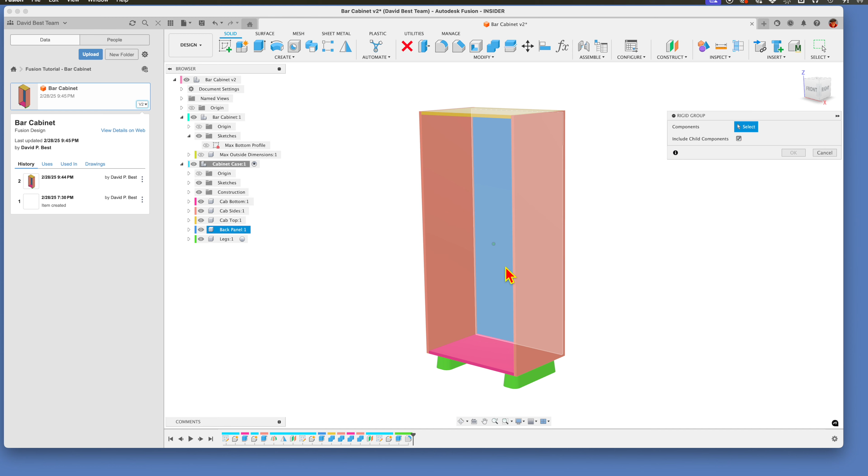And in this case, we're going to do a rigid group. And we're just going to specify the components here by clicking on them in the browser. And we're going to include child components. There aren't any here, but there will be in future sessions. So it wants us to select the components that we want to create a rigid group with. So we'll just click all of the elements of the case and say OK.

Now, if I try and move this thing around, it all comes together as one unit. I'm going to revert because I want it centered on the origin of the model like we started out. So that's one cleanup operation I want to do. Now that we've created this structure and assembled it together, I want to ground this thing so it doesn't move around in 3D space, because we're going to be adding things to it. It's often easy to accidentally get this thing moved around, and I don't want that happening here. So there's a way to do that here.

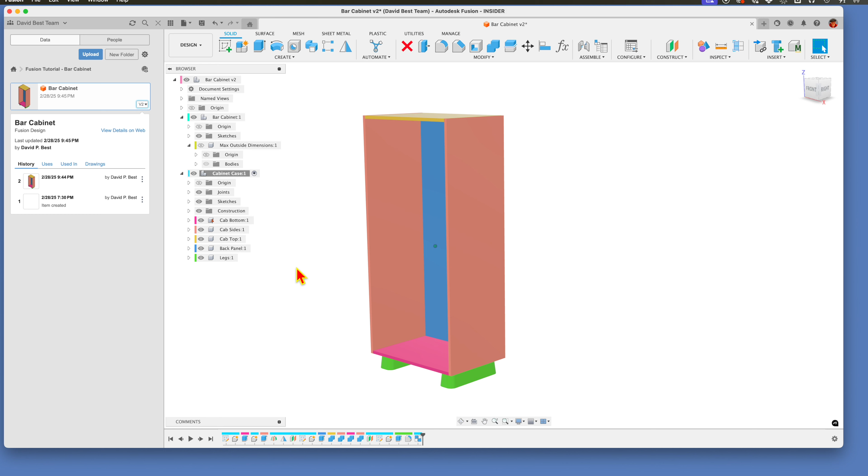It has to be done at one of the lowest levels in the browser tree, but I'm going to ground this cabinet bottom so that it won't move. So if you right click on there, we can pin that, and there's a little push pin that shows up there that tells you that it's been pinned. And now if I try and move things around, it's going to stay stationary, which I like because we base this off of the origin of the master bar cabinet component here, and I don't want this moving around in relationship to that origin. So another housekeeping thing I'd like to do here, got a couple things in mind.

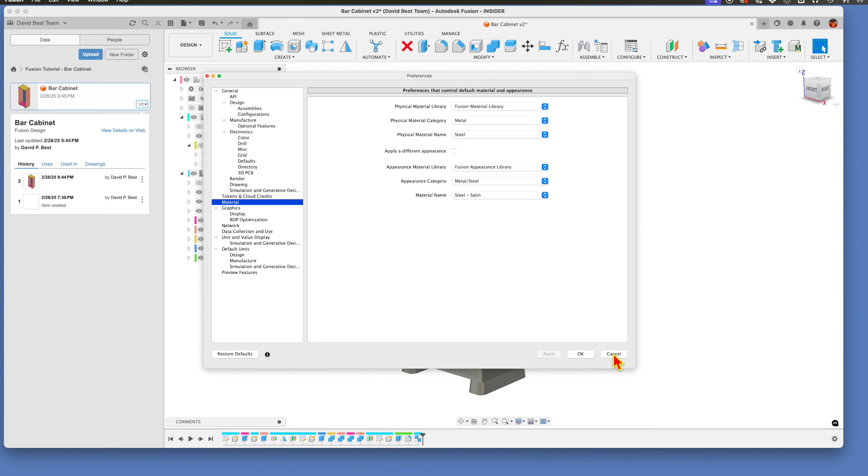First, I want to get the materials set up properly here for this thing. Let's turn off the display component colors thing. And if you look at this, what do we got here? Well, I have a preference set up. If you open your preferences panel, you can specify what your default material is. So I had this set up for metal, steel with an appearance category of steel with a satin finish. That's clearly not what this cabinet is. This is cherry. So we just created a steel box, but we can change that.

Let's modify the physical material here, and we have lots of things to choose from, including wood. So we could drag cherry over here and put that on the case, and it brings an appearance with it as well. And why is that interesting? Well, here's why. Obviously we get appearances that are better. They're not perfect. We can fine tune that later. But one of the things I'm curious about is, what does this thing weigh? Ultimately, it's going to have to be moved. So I'd kind of like to know what we're dealing with here at this point.

So we can right click on this and get properties right here. So this is the mass. And since I'm working in metric units, we've got this in grams. So we got 36 kilograms, 36,076 grams. So 36 kilograms, 2.2 pounds to the kilogram. So this thing weighs something like 80, 85 pounds as it sits right now.

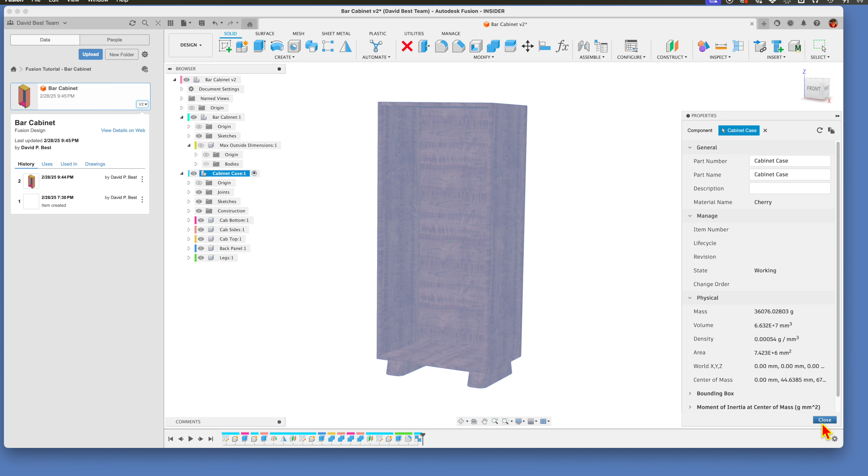Now, obviously, we told it was solid cherry back. That isn't true. It's going to be plywood. I don't know if that weighs more or less than cherry. I would assume it weighs a little bit less. But we've got an 80-pound thing here, and we still don't have any doors or drawers in it. Anyway, that's one thing I wanted to show you.

I should have set up the preferences here at the beginning to specify the category is wood, and we're working in cherry, and the appearance category we're going to use when we're all done is wood, and within that we're going to do cherry semi-gloss. So apply, and everything we do from now on until we change that setting again will be based on those default settings, so we won't have to go in and do this. But we can keep track of how this thing grows in weight. Okay, so I think that's our cleanup operation.